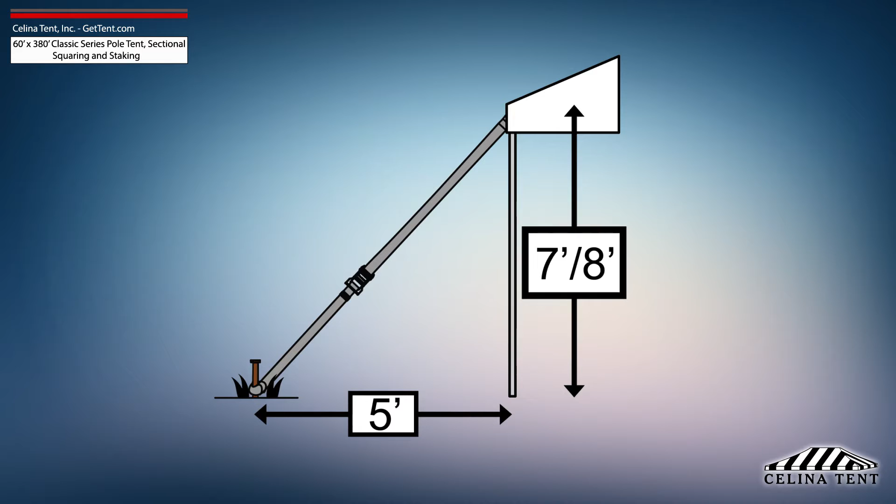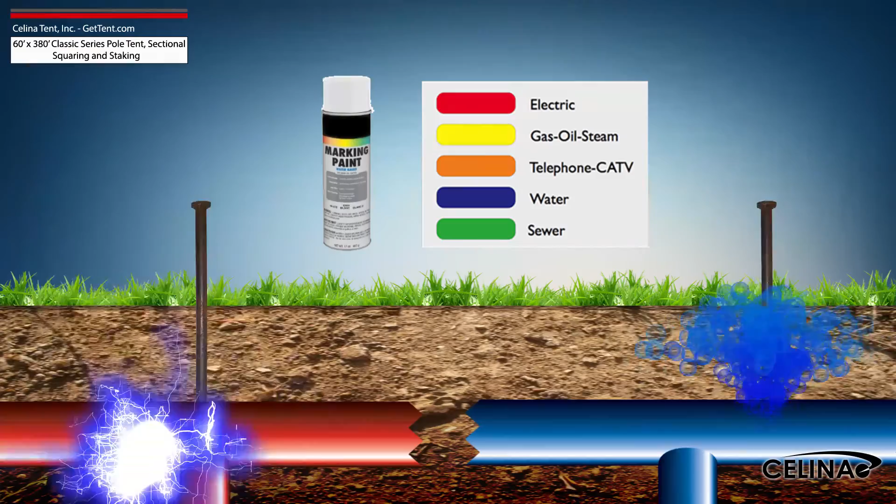Tent squaring allows the installer to accurately place all tent hardware and install tent stakes prior to beginning setup, and helps them avoid any marked underground utilities. Utilities must be marked by your state's local utility services prior to any tent installation.

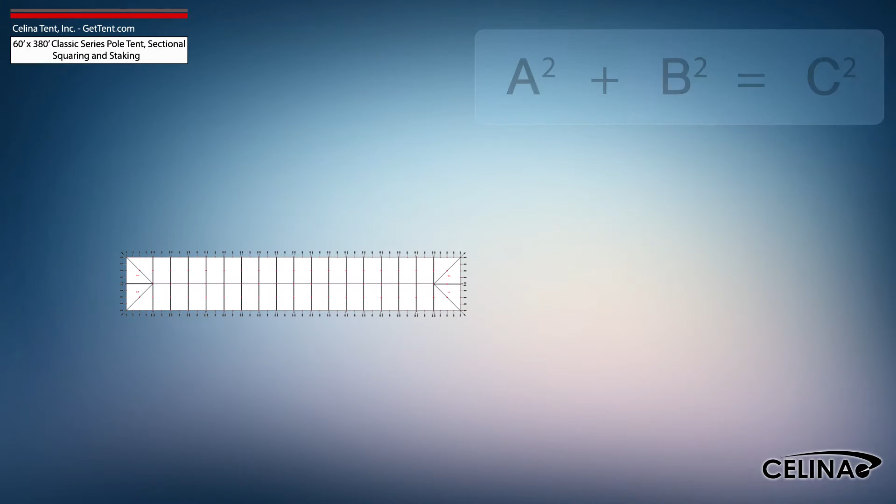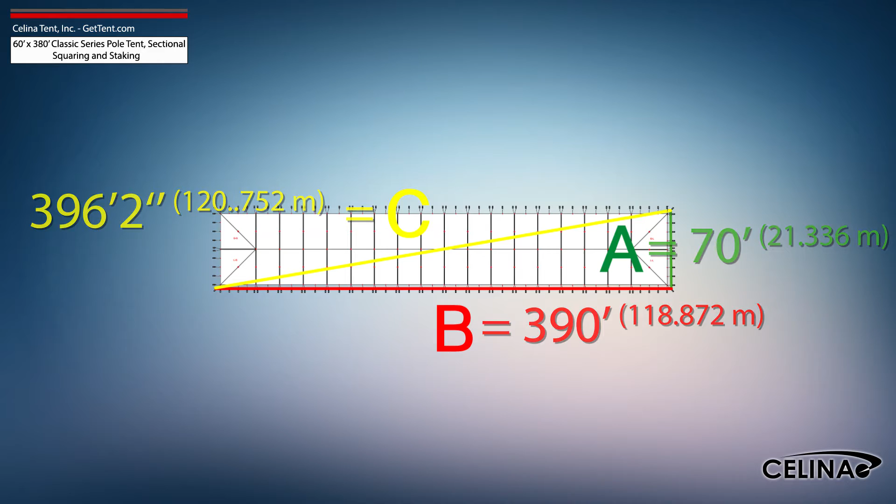Using the Pythagorean theorem and adjusting out for 5-foot staking, the entire tent footprint will be 70 foot by 390 foot, with a 396 foot 2-inch diagonal length. Celina recommends that a 60 foot by 380 foot Classic Series pole tent receives a minimum of 354 stakes.

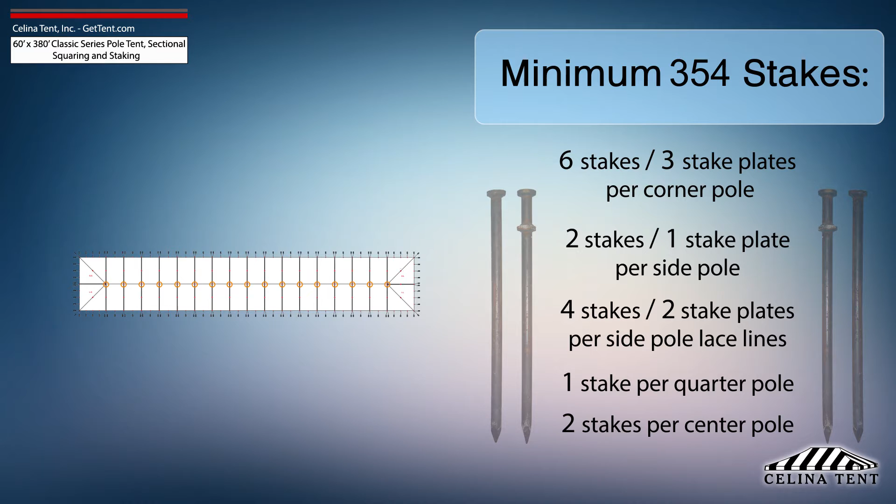6 stakes and 3 stake plates for each corner pole, 2 stakes and 1 stake plate for each side pole, 4 stakes and 2 stake plates for each side pole at lace line locations, 1 stake for each quarter pole, and 2 stakes for each center pole. This amount of stakes provides the minimum amount of security for a pole tent of this size. Additional staking is required for any site that doesn't meet optimal soil conditions.

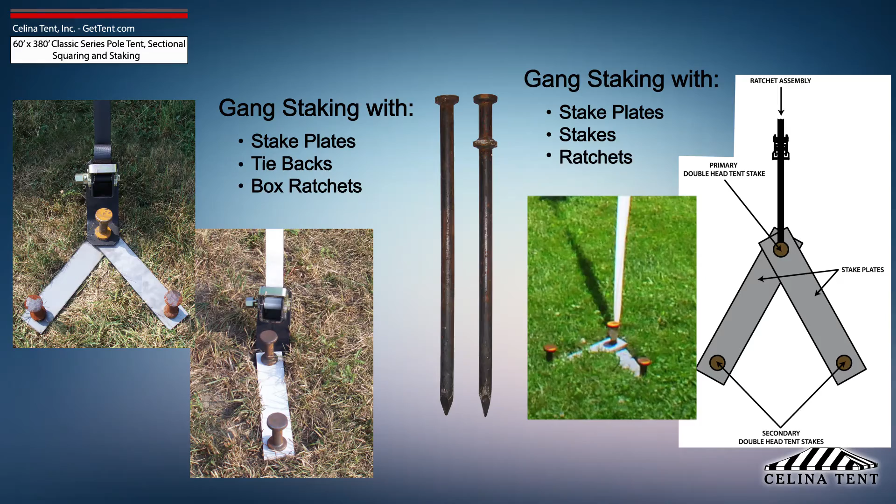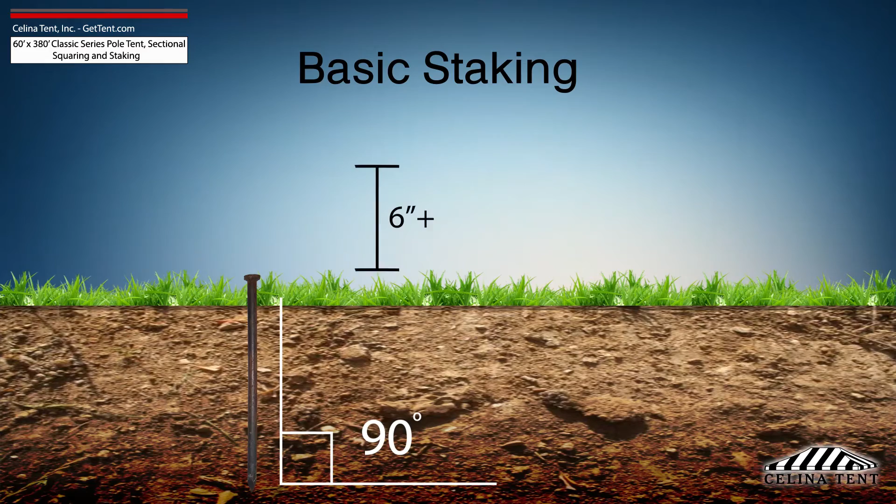Tent staking is the most important safety procedure during tent installation. Tent stakes should be driven vertically so that the stake is as close to the ground as possible with space to tie on a strap. Any length of stake protruding from the ground that is more than 6 inches will have detrimental effects on the holding power of the stake. Attach the ratchet strap or rope as close to the ground as possible to reduce strain on the stake.

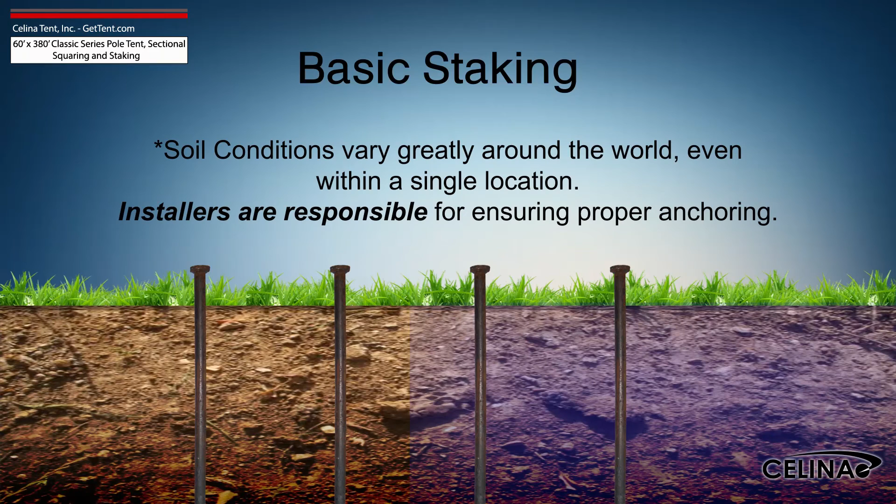It is the installer's duty to inspect the soil conditions and possible weather effects for the duration of the tent installation. For water-saturated or loose soil, more tent stakes are required to achieve adequate anchoring. Staking may be increased using dual stakes and a staking plate, or gang staking utilizing 2 staking plates and 3 stakes.